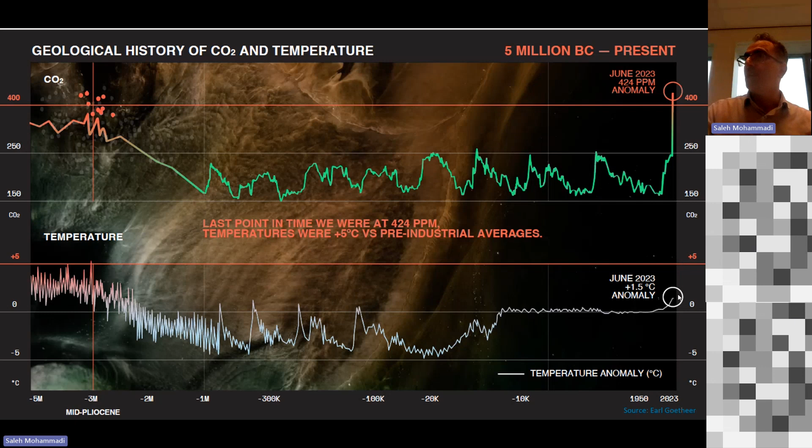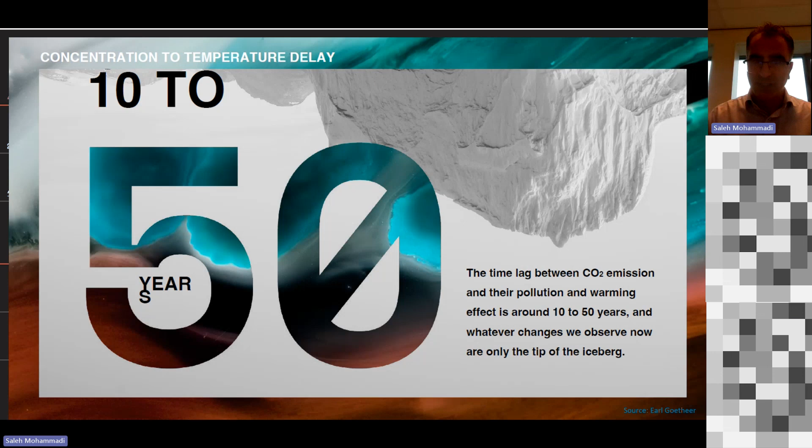But there's a big but. This is just basically the tip of the iceberg, because the historical record, if you zoom in a bit more on that historical trend, you see that there is a time lag, 10 to 50 years between these two, and this showed what is to come in terms of the impact of the CO2 increase in the atmosphere.

We all agreed, basically all the politicians agreed in Paris 2015 that they want to limit the temperature rise to 1.5 degrees. And to do so, you need to limit the CO2 level to 450 ppm.

But can we make it? That's a difficult question, because if you look at the trend over the last few decades, we were at like 330 ppm in '74, and in 2023 we are at 424. And if you compare last year with this year, we are at 427. So it's like a 3 ppm increase in 1 year.

And to get there, if we go with the same trend, we just have a few years left, less than 10 years. I think our carbon budget is somewhere between 300 to 400 billion tons of CO2, which with the annual production of 40 billion, means we are at quite a critical moment.

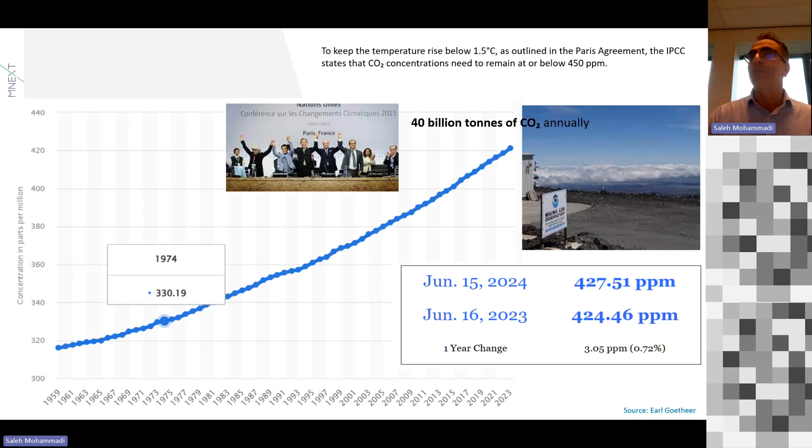So how can we limit this? The answer is probably not difficult. We need to go to renewable sources, specifically in the energy system that contributes significantly to CO2 emissions. So we need to go to renewables, and we need a significant amount, not small amounts. One study shows that if you want to stay below 450 ppm, we need at least 30 terawatts, like 30,000 gigawatts, of renewable energy power.

I'll try to translate this into what it means in terms of solar and wind. I won't go into detail, I'll share the slides, you can check it later. Basically, if you want to reach this amount with solar, you need, with the lowest to highest estimate, somewhere between 7 to 10 times the size of the Netherlands in solar power plants. And if you go to offshore wind, that means almost 70 times the area of the Netherlands. So we're talking about a significant scale.

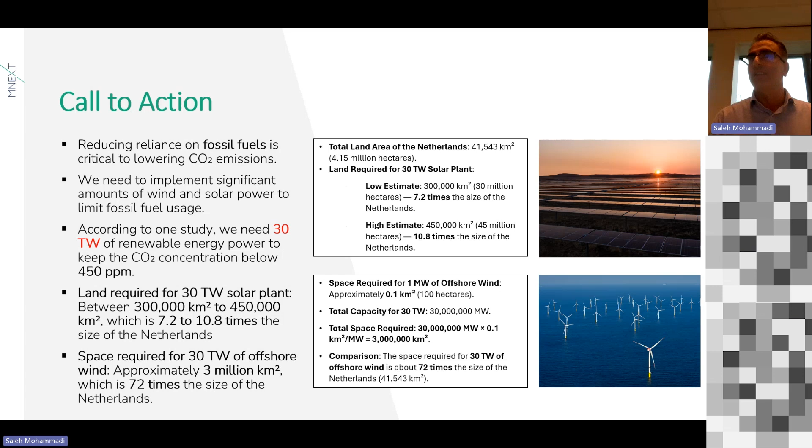But can we make it? Of course we can make it. The potential for solar is just abundant.

So if you look on the left side, this map shows global solar radiation intensity over the globe, and here is the global distribution of energy demand, basically consumption per capita. You see there's potential, but there's a mismatch in terms of location. We have the most solar-intense areas, and you can make the same observation for wind in this part of the world, but we have the demand mostly in a different part of the world.

So this shows there is a kind of mismatch in place. And that's also the case for time, because look at these graphs below. We have a lot of production over the day, but we don't have solar radiation at night, and that's also the case on a seasonal basis. So we need some kind of medium to fill this gap, both spatially and in time.

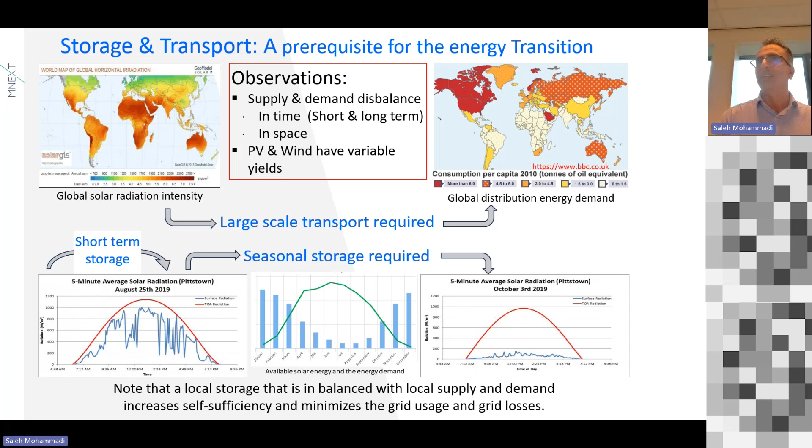That's what we believe clean energy carriers will be able to fill, this gap. I think electricity is one of the most versatile types of carriers, and we should use electricity as much as possible, where it's possible, because you don't have any conversion losses. And you see at the moment for the built environment, heat pumps use electricity.

In the kind of light electric vehicles, we use battery-based vehicles. So those are a good initiative, and we should do it as much as possible. But there's an issue with it.

If you look at the Netherlands, if you look at these maps, the red area shows the areas where the electricity network is already congested, overloaded. So there's not really any capacity anymore for new connections, or even new kinds of feed-in, but also the demand side. We have an issue there that we need to resolve.

And also for certain applications like high temperature industry, heavy transportation, or aviation, you need a more dense type of energy carrier, which electricity is not at the moment able to fulfill. So electricity is good, but we also need other types of energy carriers like hydrogen, synthetic fuels, or iron powder, basically to fill this gap.

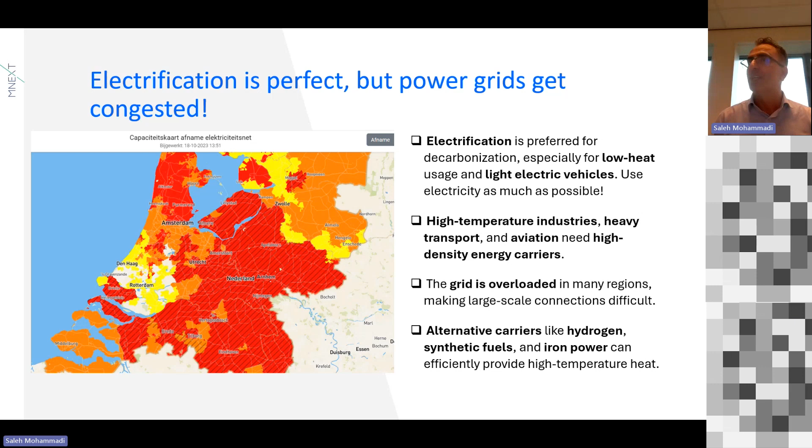And that's why my lecture is basically going to focus on this. So here are the three main research lines we are at the moment working on.

Green hydrogen: we are focusing on production, use, transportation, storage of hydrogen, grid integration, and the type of flexibility and operation of the electrolyzer, because we are dealing with dynamic and variable types of load.

Specific applications of hydrogen, for example in steel making, or derivative pathways. There are a lot of different types of hydrogen derivatives that we would like to explore, to see what they basically look like.

We also have one interesting energy carrier - that's basically something connected to the region, and that's iron powder. There are a lot of parties working on this in this region, and I think this would be a valuable research line for us to contribute to.

Specifically in this research line, we are looking at larger scale application of this carrier for energy storage and transport, but also we want to look at more local usage of this carrier, for example in business terrains or neighborhoods as a seasonal storage.

And the last one is the e-fuel, which we would like to look at - basically the synthetic fuels and how they could replace conventional fossil fuels.

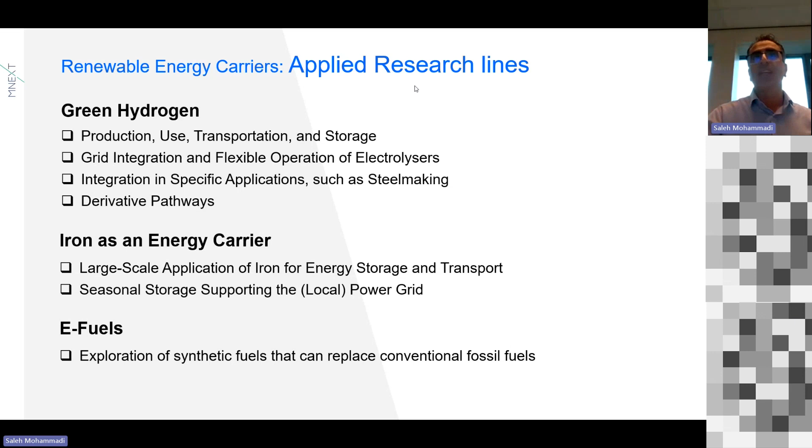So starting with hydrogen - it's become like a holy grail. Everyone talks about it, and the whole climate scenario shows that hydrogen will take an important role in the future energy system. But if you look at what kind of role hydrogen can take at the moment, also in the future...

Here is the view that I basically put here as a clean feedstock. We use hydrogen at the moment as a feedstock for a lot of chemical processes like ammonia production, or as a clean fuel.

We can use it basically at the moment for mechanical thermal applications. We currently use fossil fuels there, but hydrogen can replace them - for example, using methanol for container ships. As an energy carrier, I mentioned replacing oil, gas, coal - you have a hydrogen pipe that can basically replace those, or use it as a storage medium.

We can use it basically on a daily basis, but also on a significant scale, like a seasonal scale, as storage. Look at salt caverns or basically all the gas fields that can be repurposed as seasonal scale hydrogen storage.

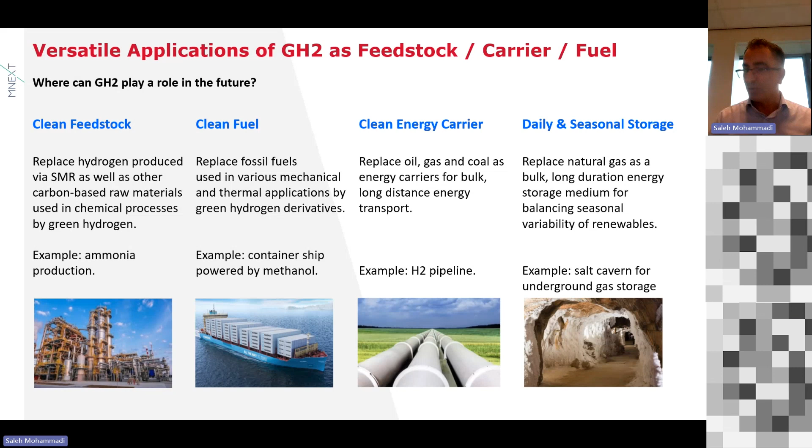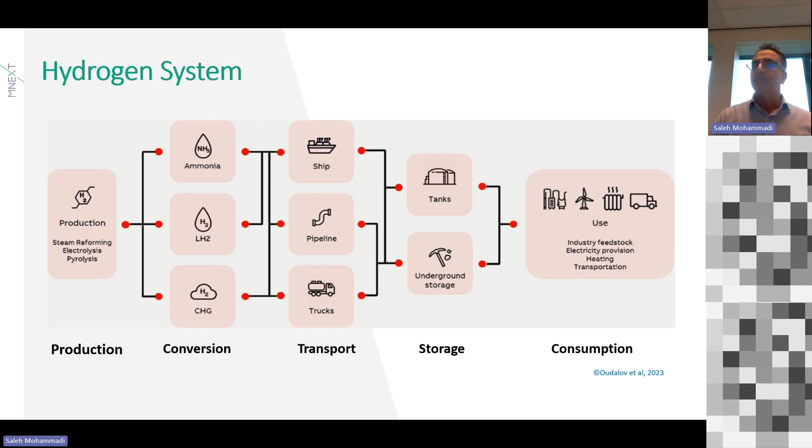If you look at the hydrogen system, it has different parts, and we are touching on a bit of each. It starts from production, then we have conversion, transport, storage, and consumption.

Starting with production - hydrogen comes with different shades or colors, as you've probably heard. This graph shows the colors based on the feedstock used for generating the hydrogen, but also the type of energy - is it renewable, is it heat? I don't want to explain all of them, but pink hydrogen is basically from electricity from nuclear power. Yellow is also electricity, but it's water-based, from fossil fuel electricity.

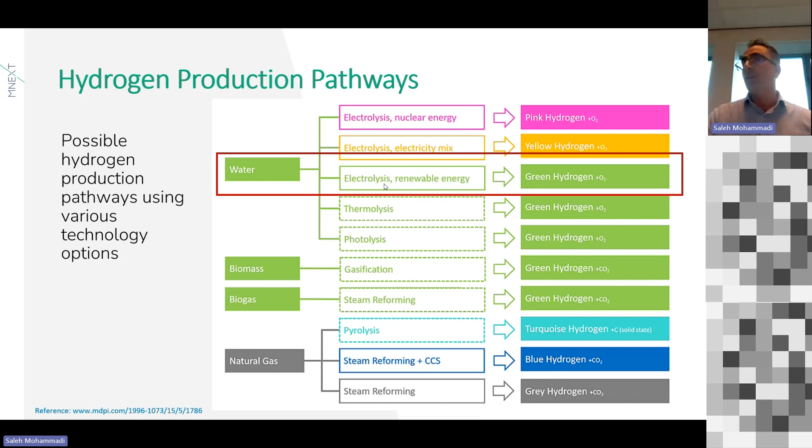The whole green shades come from different technologies, like water electrolysis, thermolysis, and photolysis, or biomass and biogas based, via gasification or steam reforming. There's also the more conventional type of hydrogen, gray hydrogen, mainly based on natural gas via SMR and ATR processes. But we can also capture CO2 from gray hydrogen to make blue hydrogen. Here we mainly focus on green hydrogen, specifically water electrolysis hydrogen, in our research group, because it's CO2 free and we can use water for generating hydrogen.

So the basic principle, I think most of you know, we just use electrolysis to split water into hydrogen and oxygen. There are different technologies for doing that. I'm not mentioning all of them, I just put the three ones that are in the market at the moment: alkaline, PEM, and solid oxide.

Alkaline is a well-known technology. I think we have an installation in Norway with a 70, 80 year history. So it's a mature technology, and it's low cost. You don't use very rare types of materials, and it's widely used in industry for years.

But more on a lower TRL, we have PEM. PEM stands for proton exchange membrane electrolysis, and they use a solid polymer electrolyte to carry hydrogen protons from the anode to the cathode. It's quite efficient, has a high current density, and is capable to ramp up and down quite easily compared with alkaline. That's why you see more and more application of PEM electrolyzers with renewable energy sources, because it can react quickly to the network dynamics.

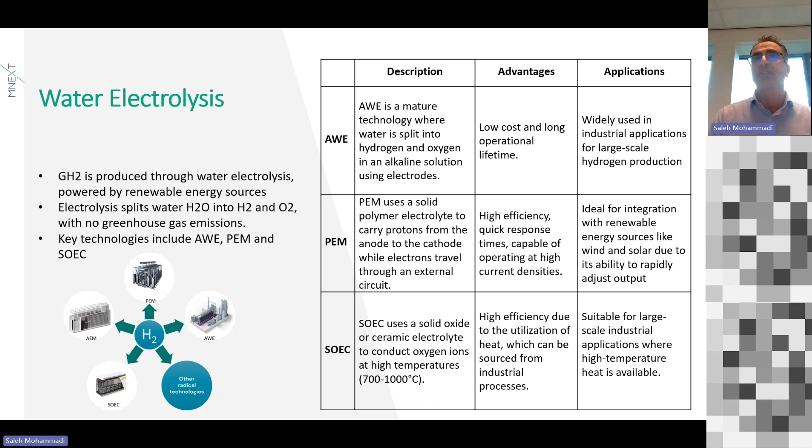Here is the basic functioning of this electrolysis I mentioned. I don't want to explain in detail, but here you see how the hydrogen and oxygen evolution reactions occur.

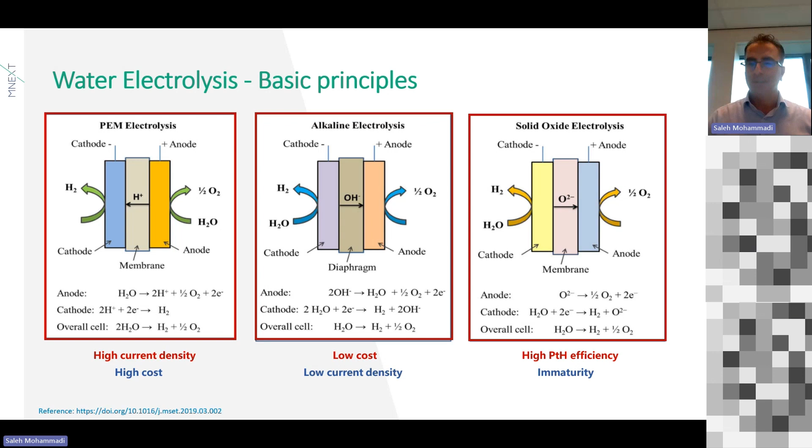But this technology also comes with challenges. We recently started a project we call HyPro, a national project in the Netherlands, where we're looking at how we can improve the performance of this electrolysis technology. For example, for alkaline, we need to increase the density, because at the moment they're quite bulky due to very low current density, so that needs to be improved. But also we need to use non-PGM catalysts—this is a type of rare material that makes it expensive—so we're looking at what kind of alternative catalysts we can find.

If you look at PEM, it's more critical because we use a lot of iridium. So there's a lot of research ongoing into how we can decrease the iridium loading in PEM electrolyzers and find more low-cost, cheaper catalysts. There's also quite a lot of research about using PFAS-free membranes, for example.

On the solid oxide side, it all comes back to increasing the lifetime. I mentioned we're working in a quite high temperature environment, 700 to 1000 degrees. You need to be sure that the materials you use can keep their mechanical strength and structure, so a lot of research is ongoing on how we can increase the lifetime of solid oxide electrolyzers.

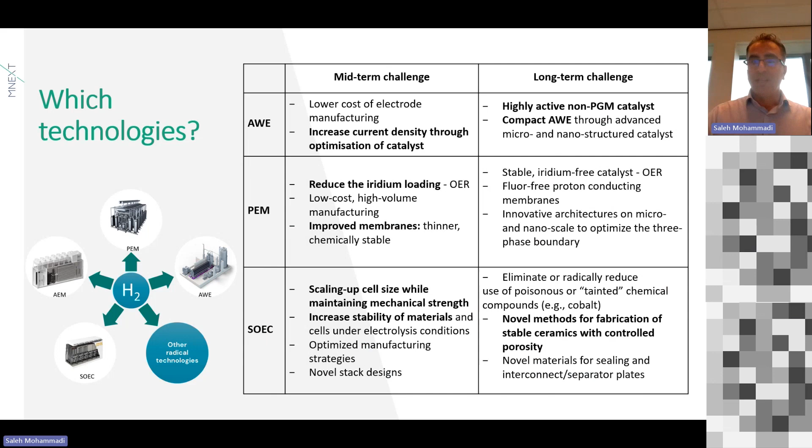If you look at the production side, looking at current production—this might be a bit old, 2021—but at the moment we're producing around 100 million tons of gray hydrogen, mainly used as feedstock for industry. But the projections show we need to go to close to 500 million tons of hydrogen by 2050 if we want to achieve what we've already imagined for getting a CO2-free energy system.

And a lot should also come from renewables as green hydrogen, or also more of a transition solution, which is blue hydrogen.

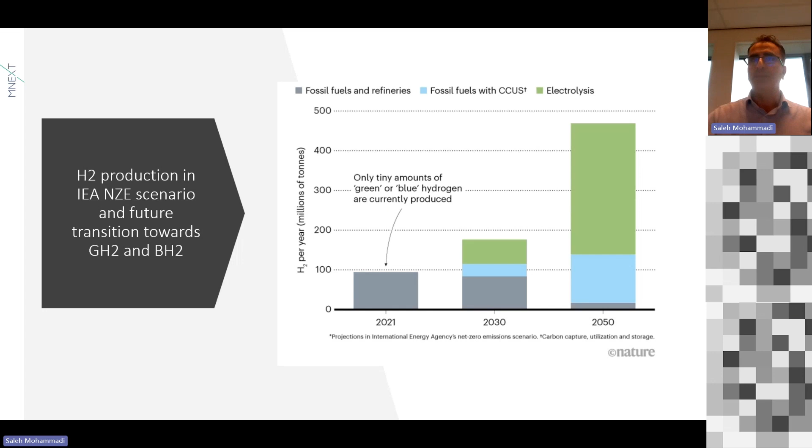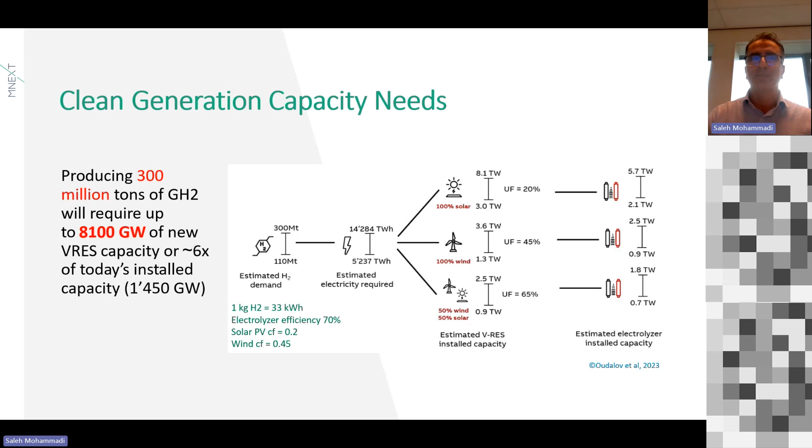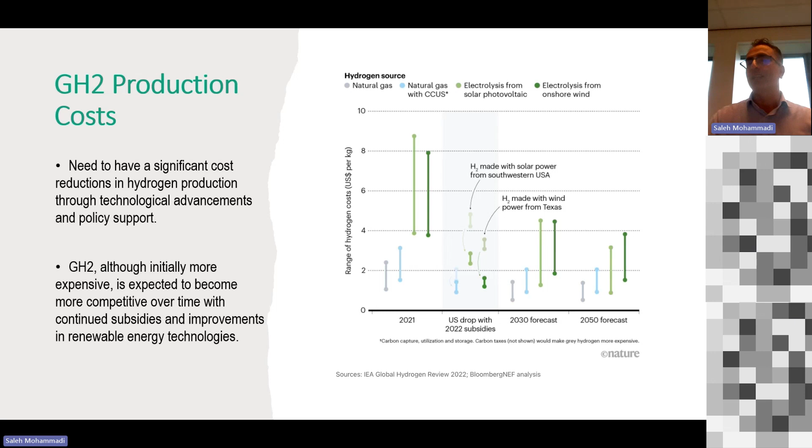Regarding the cost of hydrogen production, at the moment gray and blue are in the range of $1 to $3 per kilogram, and the green one is quite high because the technology is not mature yet. Green power is expensive, but we need to decrease that if we want to create a stable offtake or market for green hydrogen. There's a projection that, like solar, this might also happen as technology advances, supporting policies emerge, and a market develops to help reduce the price of green hydrogen.

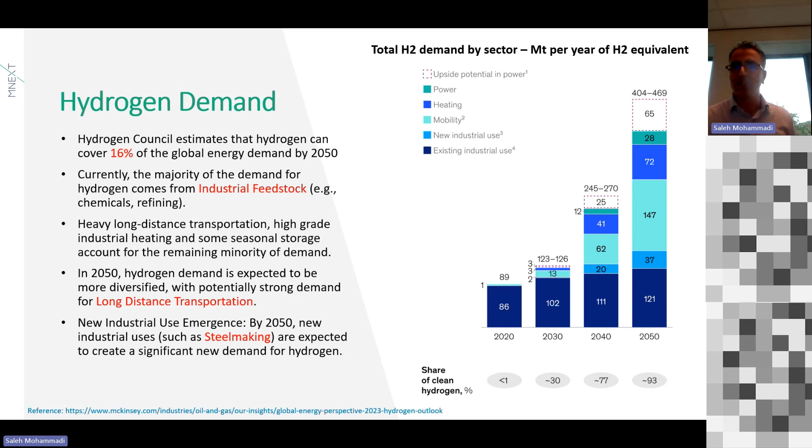On the demand side, I mentioned that at the moment we use close to 100 million tons of hydrogen, largely as feedstock for industry. But projections show we have to go to a significant scale, and you see how demand will diversify on the off-taker side. Industry still keeps the big chunk of hydrogen and green hydrogen, but then you have new players like mobility, mainly long-distance transportation where you cannot use a battery, or new industries, for example steel making, where you need green hydrogen to make green steel, or for high temperature heating, or for power generation. These are the new off-takers for hydrogen and green hydrogen that will come in the next 2 or 3 decades.

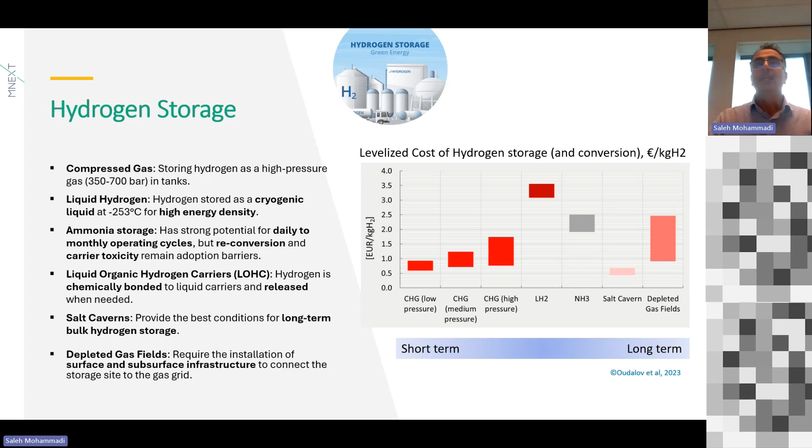On the transportation method, that depends on two main factors: distance and load. For short distances, it's similar to storage—you can use compressed hydrogen gas trucks or local pipelines. But when distance and load increase, you need to go more for transmission or transportation pipes, or on the intercontinental scale, displacement of hydrogen goes to ships, for example.

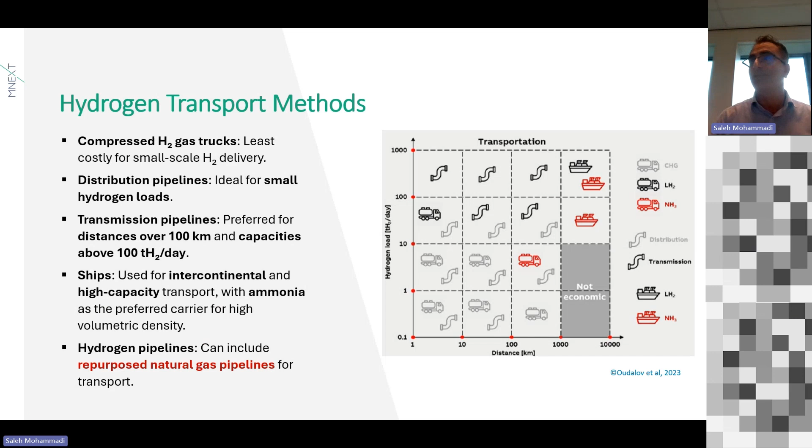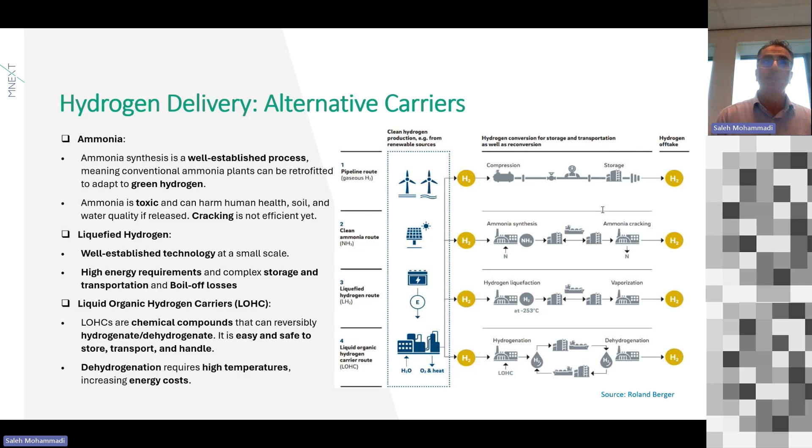Liquid organic hydrogen carrier is quite interesting. The TRL is very low at the moment, and there's a lot of research ongoing which basically uses some kind of chemical compound or material to bind hydrogen molecules. Via hydrogenation or dehydrogenation, you can basically move hydrogen to the location that you want. But again, this is a low TRL, and a lot of research is still ongoing about how LOHC could take a role. So that was very brief about the hydrogen.

I'll also be brief about the second research line, which is about iron power, or iron powder. I mention this because there are a lot of parties basically in Brabant and in the area that are interested and working on that.

The basic principle is quite simple. We have renewable energy, we make hydrogen, and we use that hydrogen to reduce the iron oxide. By doing that, we create iron powder, and we transport that iron to the demand location, where we oxidize it. By doing that, we either generate heat, or in a kind of wet cycle, we generate hydrogen. We use it and create rust or iron oxide, move that back to the original supply point, and this cycle can reiterate many times. It's a very safe, non-toxic, non-explosive carrier with quite high efficiency.

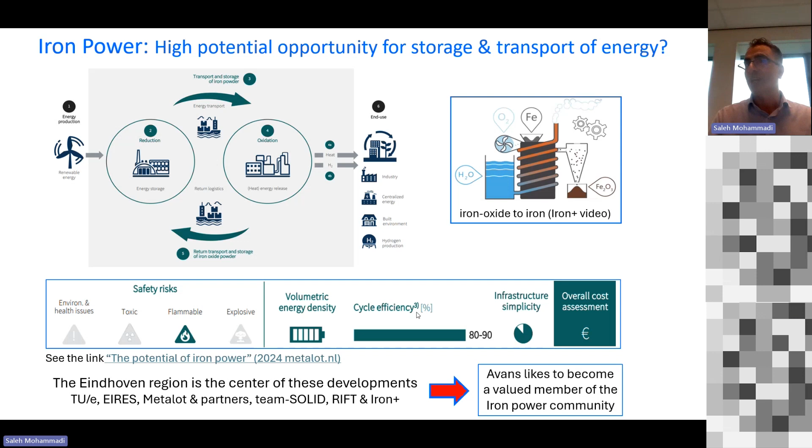You could basically do the oxidation in two ways. Either you just burn it and generate quite high temperature heat, 800, 1000 degrees, and use it for whatever application you need. Or you could use what we call a wet cycle, where you oxidize the iron via steam and generate pure hydrogen. This is a technology Eindhoven University is working on, team SOLID, and we are working with them to see how we can contribute to this interesting cycle.

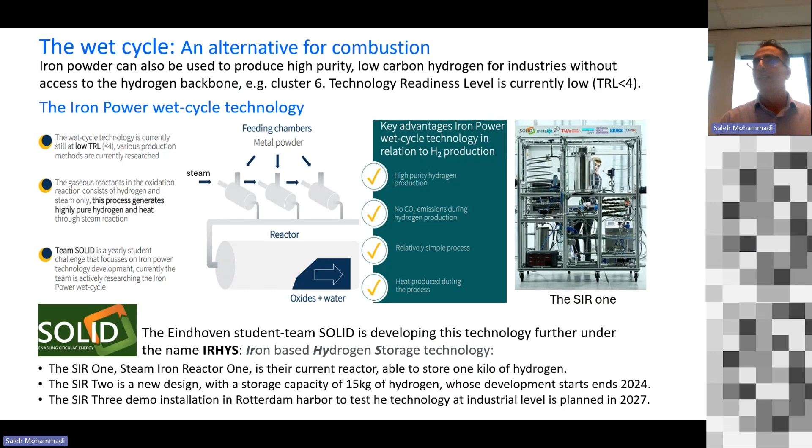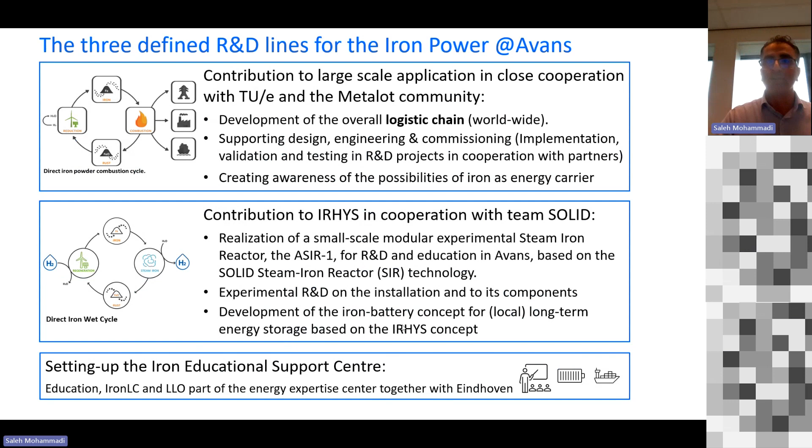Based on this, these are the main areas we are currently looking at for iron powder. We are looking at larger scale application of iron powder for moving or displacing energy over long distances. But we're also looking at how we can use iron powder more locally, for example as a storage medium or seasonal storage, for dealing with network congestion. And of course, as an Applied Science University, we'd like to basically create a knowledge base on iron powder at Avans as well.

The last research line I'll mention is e-fuels, or synthetic hydrocarbons, basically created to replace fossil fuels. In this line, we try to explore these synthetic fuels. If you're talking about renewable fuels in general, we have two main options based on the feedstock you use: bio origin, biofuel or biogas. This is quite well known and well regulated in the EU, so it's not our focus.

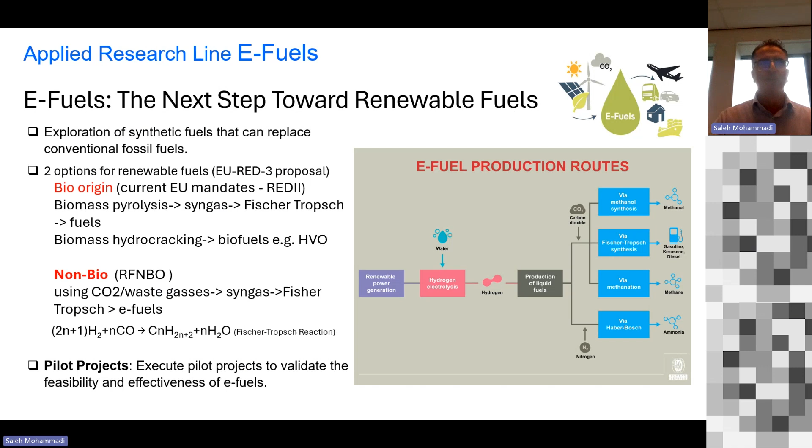We have our own opinion about it, you can ask me, we can have a discussion. But our main focus is on the non-bio fuels. In RED 2 and 3 this is known as renewable fuel of non-biological origin, where we mainly use hydrogen and CO2 as the main feedstock to generate these fuels, mainly via the famous Fischer-Tropsch process. Our goal is also to execute or build a pilot plant with our partners to generate these e-fuels.

I think I'm running out of time, so I'll be very brief. I've mentioned our research lines. Our ambition is to establish ourselves as a leading knowledge partner in the region with regard to hydrogen and clean energy carriers in Brabant, in the South Netherlands, together with other partners.

Sander, I don't know, do I have time or should I stop? Because I want to just show some ongoing projects. Yeah, I think there's 10 minutes left officially on the counter. Okay, there are 4 questions. I'll make it just in 1 minute so I can finish it.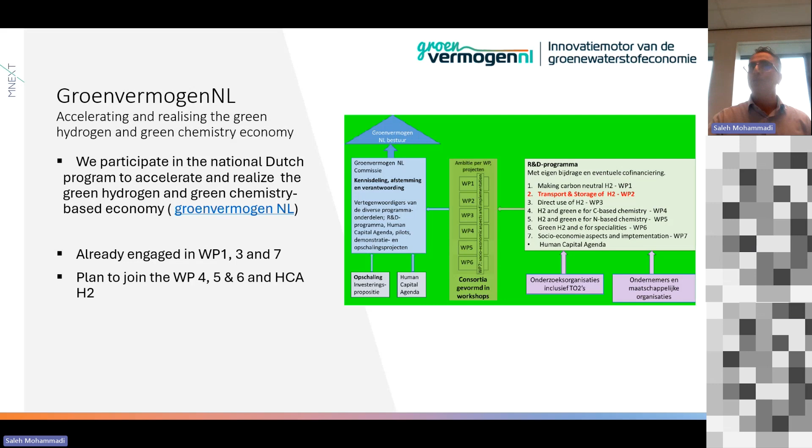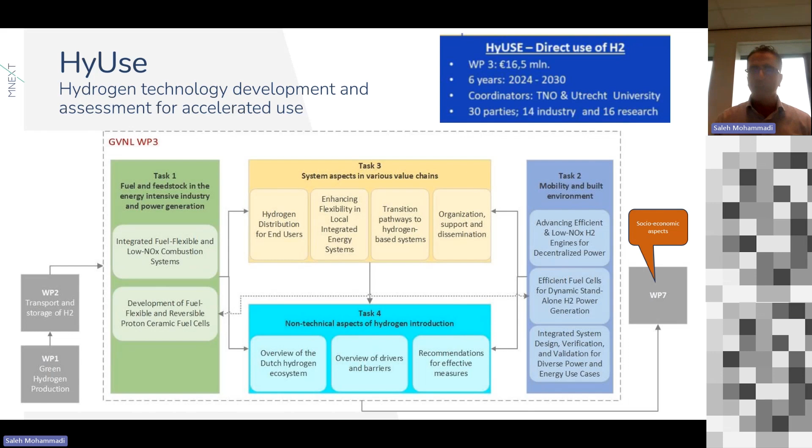That's okay? Yeah, so we have a few ongoing projects, all part of the GroenvermogenNL. First one was HyPro, which mainly focuses on hydrogen production. We also have HyUse, which looks at the demand side and use of hydrogen. Here we specifically work on the hydrogen microgrid for the wastewater treatment plant. I think Sander, as part of our lectorate, is working on it. We recently granted HySUCCESS, which mostly looks at the social acceptance of hydrogen.

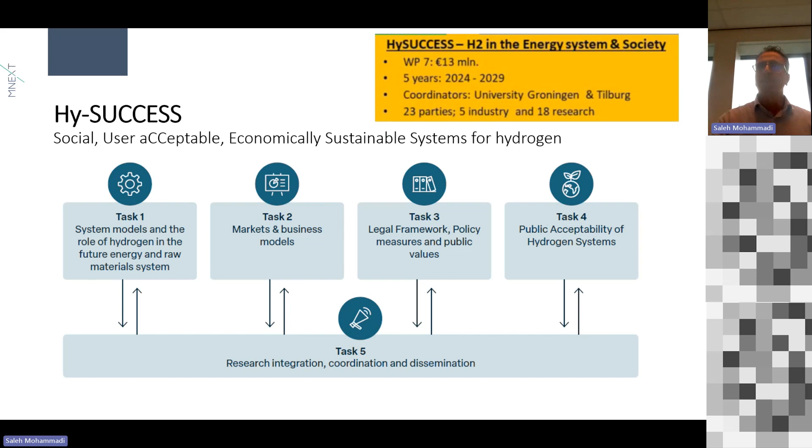And basically the market and the business models to make it work. The last one, not the least, is a project we recently have been involved in, and it's about green steel - how we can use hydrogen to green the steel industry, one of the global industry pollutants. This was some of our ongoing projects, but I would love to talk further about that with you, maybe in another opportunity. That's it.

Thanks, Sander. Yeah, no problem, Saleh. Thank you for this very comprehensive overview of your lectorate and the plans and visions you have. I saw 4 questions coming in, and we're going to run them down in chronological order, starting with the question from Yide Gau, if I pronounce your name correctly. He asked: to what extent is nuclear energy currently in the scope of renewable energy discussions and research? Are there particular challenges of integrating it into the energy system and grid?

You mean nuclear energy? Yeah, there's a lot of discussion about nuclear energy and application of new nuclear energy. I believe that nuclear energy can have a role in the energy system, because if we want to reach a zero carbon energy system by 2050, it would be very difficult to achieve that only by solar and wind. You need some reliable base source to get there. This is open for discussion, but we need to a certain level a reliable base load to make electricity for our energy system. If you want to connect it to hydrogen, it could be an interesting case to make pink hydrogen, for example. There's discussion of having an SMR type of power plant only to generate hydrogen for industrial clusters, like Tata Steel. But we see a role, though we also understand that from social acceptance, a lot needs to be done to make sure it's safe and remains a safe source of electricity.